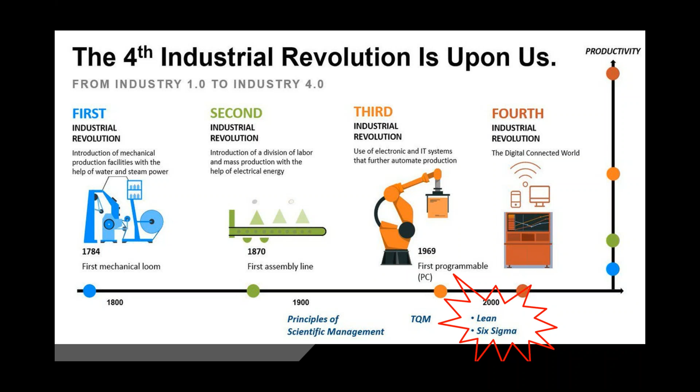So this is something to keep in mind, Lean and Six Sigma. If you watched the previous MPC webinar, especially the second one, the speaker talked about Lean management. He already mentioned that before technology comes in, you must start with dealing with what actually happens in your factory, in the process line. If you are unable to solve the problem, then you bring the technology in, like software and hardware, to try to optimize and reduce the cost.

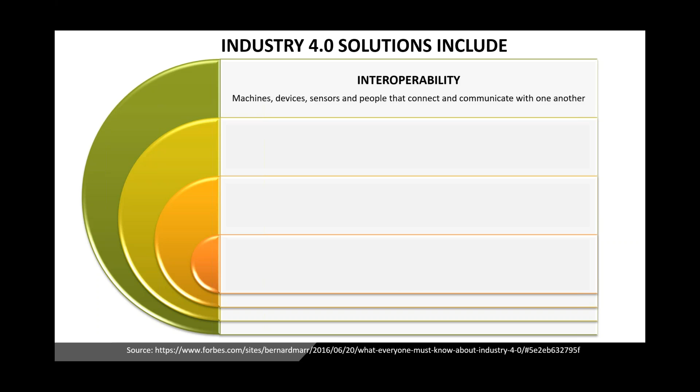So Industry 4.0 solutions include, just as a general introduction: first, interoperability, where machines, devices, hardware, software, sensors, actuators are all interconnected and communicate with each other. It's very ideal. Machine to machine talk, human to machine. That's interoperability in Industry 4.0.

Secondly, transparency of information. In the past we depended on humans, on the operator and the supervisor, to feed us the information. But of course, when humans feed back information, the accuracy is not high enough, or maybe there is some hanky-panky behind the data fed to the owner or the PIC.

So Industry 4.0 really makes the information transparent, naked. We know what actually happens on the shop floor. Of course, to get to this level, you need a lot of technology embedded in the machine, or retrofitting the old machine, etc.

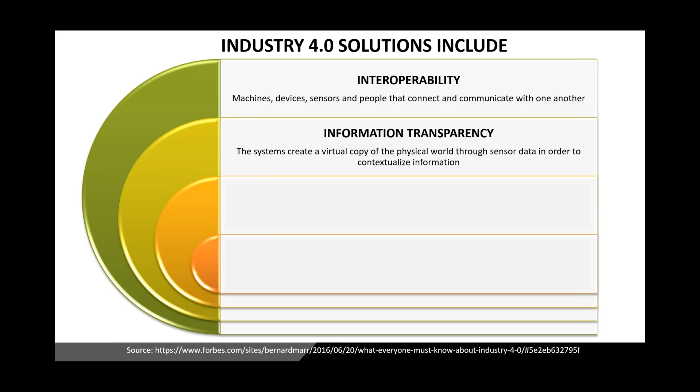Thirdly, the ideal way for Industry 4.0 is to decentralize decision making. They cut off a lot of red tape, a lot of levels for decision making, and a lot of time. This is where the cyber physical system makes simple decisions on its own and becomes as autonomous as possible, to cut red tape and time in decision making.

Lastly, technical assistance. It's about the ability of systems to support humans in making decisions and solving problems, and the ability to assist humans with tasks that are too difficult or unsafe for humans. This is what happens.

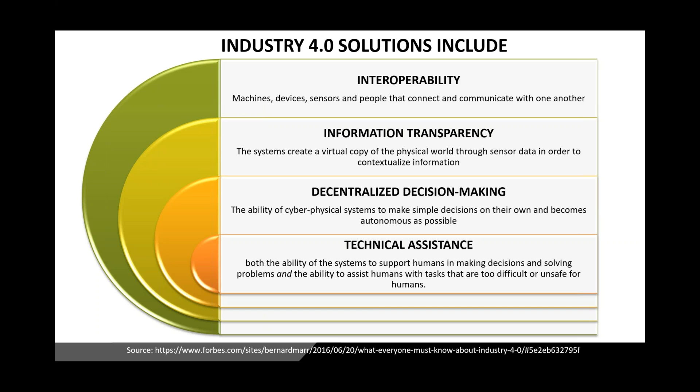Too difficult, unsafe, or the human is too tired, because humans themselves can't work 24/7. So we need something to support us. The company needs technical assistance to increase its productivity.

As you know, Malaysia already launched the National Policy on Industry 4.0, or in short Industry4WRD, since 31st October 2018. I hope you all really read through this policy and have some idea of what Malaysia is going to do for the industry. For Industry4WRD, in the logo you can see ACT: attract, create, and transform.

If you are familiar with the Industry4WRD readiness assessment, or this policy, there are 3 focus factors. First, people. Second, process. And thirdly, technology. People is about how you create and nurture more people to support the industry towards Industry4WRD. You need talent to support the industry, and retraining, reskilling, and upskilling of workers.

For technology, there are certain technologies that enable the company towards Industry4WRD. In Malaysia's Industry4WRD policy, there are around 11 enabling technologies reported. Process is how you use the technology to improve the process and increase the productivity of the company. So these are the 3 main factors: people, technology, process. It's the way towards Industry 4.0.

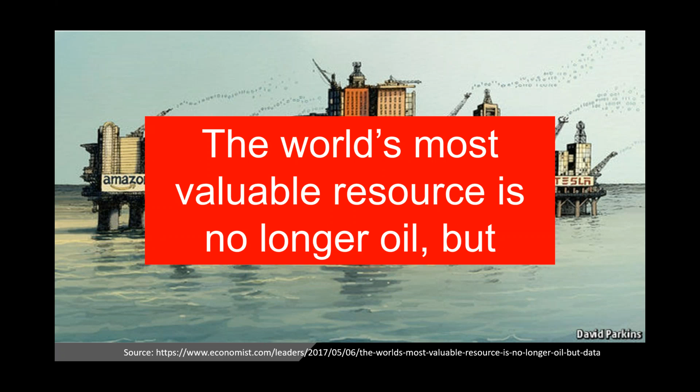This comic cartoon shows Amazon, Uber, Microsoft, Google on the oil platform. So what is this about? The world's most valuable resource is no longer oil, but what? Data. We need data.

Every day we use mobile phones. Some of my friends have 2 phones. What do they do with them? They use them for personal matters and official matters, with a lot of apps behind. Now, during the MCO, I think most people like to shop online using Shopee, Lazada, Alibaba, Tmall, etc. A lot of data is generated behind that, captured by the owner, by the app developer.

For what purpose? To analyze what is the behavior of the consumer. Yeah, this is data for the retail industry. How about for the manufacturing industry as well?

Manufacturing industry, right, in the process side, a lot of data is generated. Okay? Traditionally, they capture data in the manual form. People just record the data. Or the more advanced ones, they're using the SCADA system, or the PLC and SCADA system to capture data. A lot of data is being generated, but are they doing something with the data, or just using the data to plot the graph and then that's all? They're not really fully utilizing the data for decision making purposes.

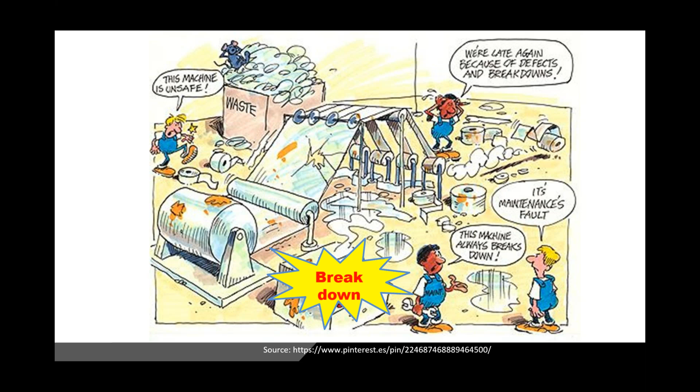So ultimately we want to know what actually happened, then we try to solve the problem. Okay, so in traditional companies, the shop floor is very messy. There are a lot of breakdowns of the machinery. Maybe setup and adjustment problems, wrong setup or wrong adjustment of the machinery. And then small stops. Every small stop causes delay. And then small downtime.

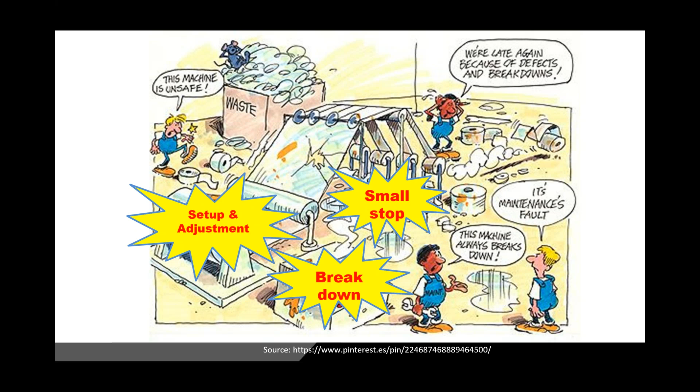And then there are a lot of reduced speed problems. It should run up to this speed. Why suddenly does the speed slow down? And then maybe the startup reject. Not proper startup, not proper setting, causing startup reject of the machinery. As well as production reject. The setting is off, the misalignment of certain things, causing production reject due to quality. Not up to the size that we want, not up to the precision that we want, causing the rejection.

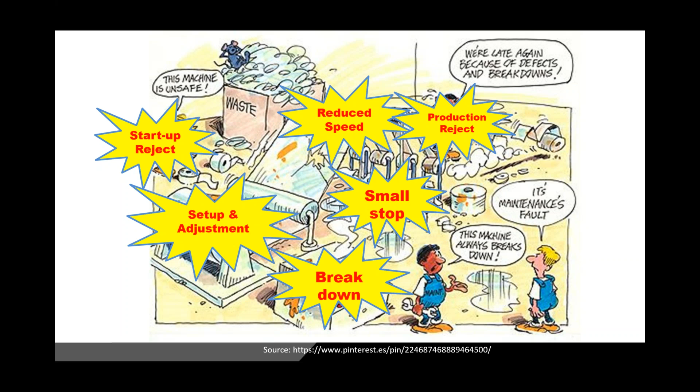And this is all about the cost. The time lost and the rework cost a lot of money, right? And also the energy usage in the factory, all about the cost, as well as a lot of waste. When there is a lot of reject, some items that cannot be recycled are waste. If it is recycled but the value of the material has already dropped, then that becomes a waste. It becomes a loss to the company.

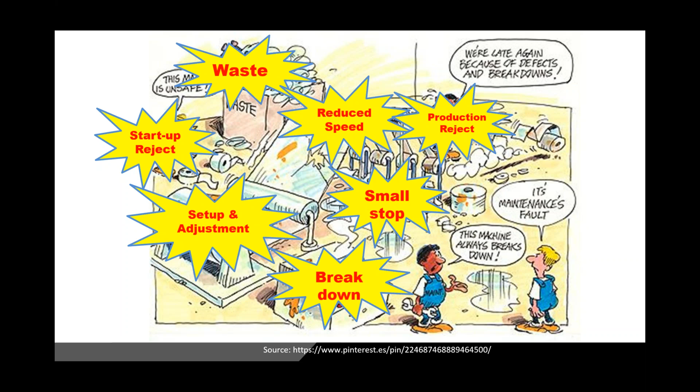So as management people, engineers, supervisors, a lot of questions come into our mind, right? Normally, who is causing the problem? Who is responsible? Normally we know, but who is the actual person responsible? Who to involve? Who to call? And then what happened? What actually happened to the machine? Why is it always stopped? Why is the speed always not up to the level? Why is the productivity low?

And then we need to ask ourselves, where does the problem come from? Which part is causing the problem? And then why has it happened? Why did this happen to section A, not section B? There are a lot of questions coming up. And then where did it happen? And how did it happen? This is the 5W1H, a very common method, right? We think about who, what, where, why, when, and how.

So this OEE, overall equipment effectiveness, is interrelated to total productive maintenance. So here's some idea for you. TPM is about zero unplanned downtime, zero defects, zero disruption. It means the company, the shop floor, has very proper planning for the maintenance of the production line.

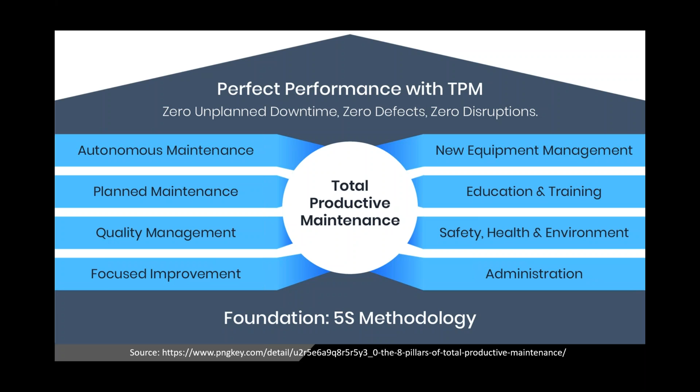This TPM has the 5S methodology as its foundation. I think some of the topics were already covered in the previous MPC webinar as well. Okay, so I just set your mindset: what's the data, then what happens on the shop floor, and then what's TPM, total productive maintenance. Okay, so coming to OEE. OEE is very straightforward, right?

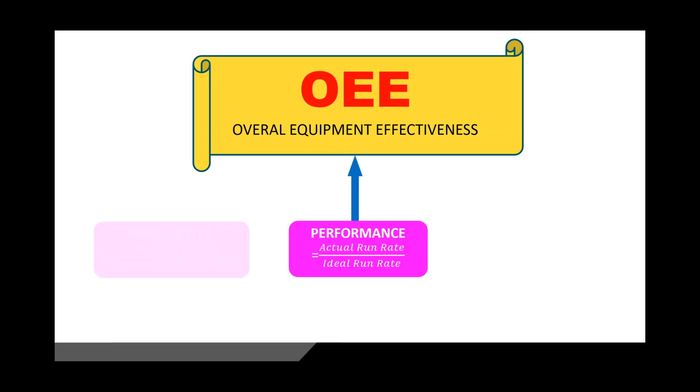It's a formula for us to know the effectiveness of the equipment on the shop floor. Or in very simple terms, we want to know the productivity of that machine or that equipment. So OEE has three major factors. First, we look at performance: the formula is the actual run rate over the ideal run rate. Secondly, availability: the operating time over the planned production time. Thirdly, quality: good pieces over total pieces.

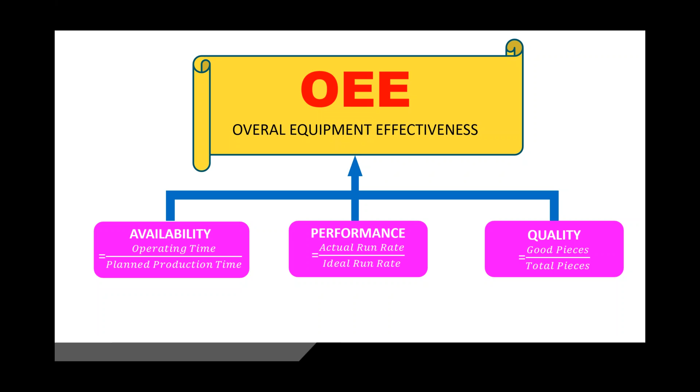I think after my talk on this topic, Mr. Loong will continue with how to implement OEE on the production floor. Please stay tuned. And then, OEE can generate a lot of data, and we can plot a lot of graphs. These graphs let us know what the data is useful for. They can give us some ideas.

They give the supervisor, manager, senior manager, and top management ideas about what to improve, where to improve, how to improve, and what's the best method to improve, using the management way and maybe the technological way to improve the process. It's for decision making as well. This data will feed to management for more precise decision making to target the actual and right problem. And then it's a tool for planning.

Of course, some people say that OEE actually is a KPI. If this machine cannot achieve 100 pieces per hour, then there's something wrong there. KPI. But normally it's actually used with positive thinking, for improvement, decision making and planning. It's not meant to accuse anyone, like, hey, I implement OEE because I want to monitor you.

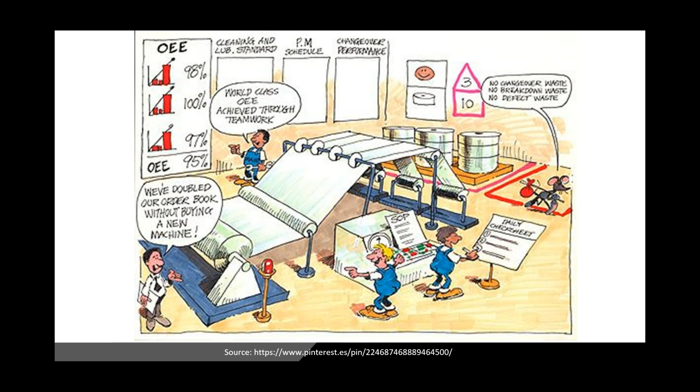Normally we like to advise all factory owners and engineers: please look into your process first. Improve the process using lean manufacturing methods, like in the second series of the MPC webinar where we talked about lean, right? The management and administrative levels have to think about the best way to improve, to cut down, and to solve the problem first before you engage the technology.

Okay, this is something to think about, because I think most of you are very experienced in the industry. You use a lot of methods, okay? TQM, Gemba, Kaizen, right? And Poka-yoke. With these methods, try to improve. If you really cannot improve, and the price is very competitive, then think about how technology can really improve it.

You also can buy a new machine, but before you buy the new machine, think about: can I further improve what we have now, the existing machine, before we make a new investment? It's something to think about. And then, of course, we can make the investment decision, whether to put more money into improving the current process, to go for upgrading, before buying the new machine.

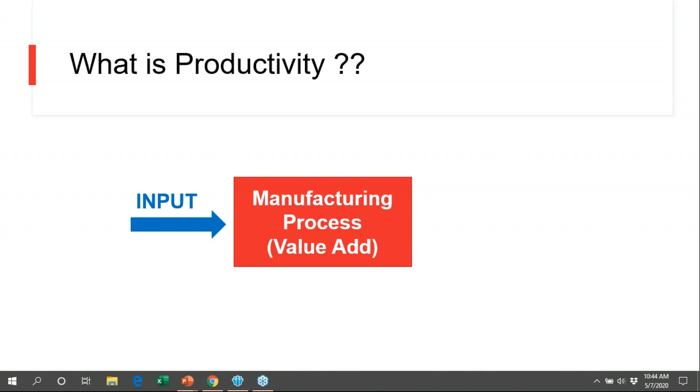Next. Okay. People start to talk about efficiency and also effectiveness. Now, where is efficiency, effectiveness? Every value add or every manufacturing process, you will always have an input and an output. Efficiency talks about the front part, where you use as little as possible, try to save whatever you can, and effectiveness is the other end, we should talk about the output, maximize whatever you can maximize. Okay, this is what we meant then as productivity. Next, please.

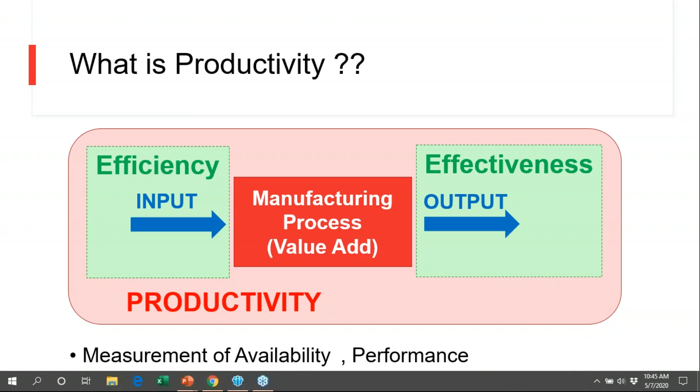In productivity, in general, it's always expressed as a ratio of output to input, for example output per unit of input. Now, moving on, when these terms came up, there's a lot of research on productivity. And when we research productivity, there are new terms which are developed. Next, please. You have downtime, which is actually availability. You also talk about cycle time. Next, please. Which translated now is performance. And you have a lot of talk about rejects. Next, please.

on this one. But just a point here is, like what Dr. Tan said, availability is easy to measure when the machine is down, when you stop the machine for changeover. But the difficult one will be performance, because every minute that the worker slows down for whatever reason, every 2 minutes that he goes to the toilet, those are all unrecorded. And hence it makes it difficult for us to further improve it.

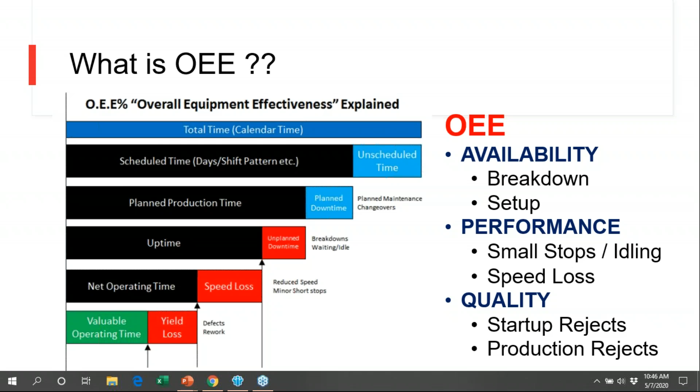Okay, as an average, manufacturing plants run between 45 to 65% OEE, but again, this is a very general number, and sometimes it can be a dangerous number because every industry is different, every machine is different, every industry in terms of sales demand is also different. There is mass production, there is batch production, there is mixed line. There are so many components inside, so we should take it with a pinch of salt. Okay, next please.

Okay, now I'm going to come back to the company. Our journey in Lean. We were introduced in 2014. In 2014, we had a good introduction from MPC and FMM. And along the way, we had SHRDC come in. We had some Japanese counterparts. At one point, we had an in-house Japanese consultant to introduce it to us. Now, what was good then? Next slide, please.

Okay. What was good then is we were discussing among all the parties, getting information, getting input. We managed to establish a lean strategic map for ourselves. Now, this was very new to us. That was back in 2015. We had a map, but frankly, we had no time frame. That was because we weren't sure what was going to happen. So we decided to take it one step at a time. What we knew was that there are only 3 steps and we need to get through the 3 steps. So next, please.

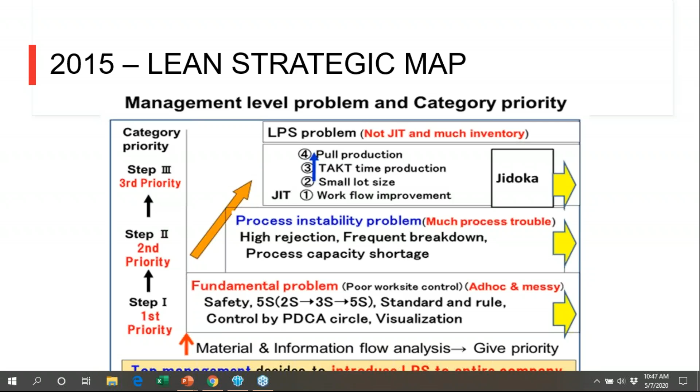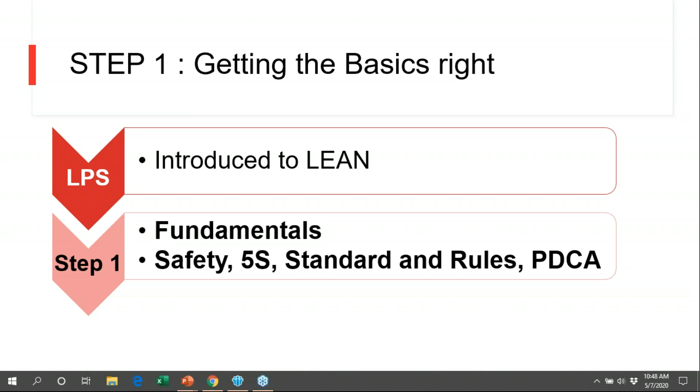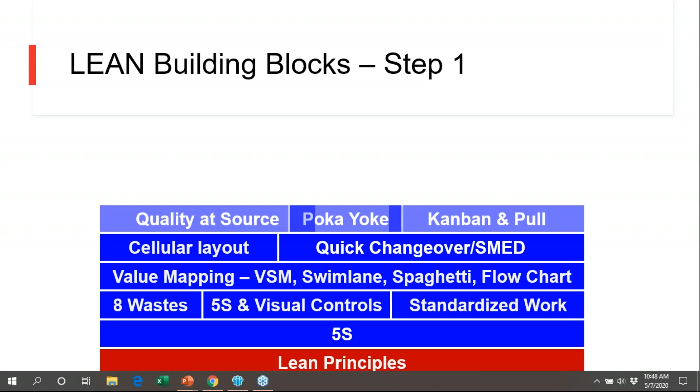So we start with step number 1. One more click. Yep, we start with step number 1, which are the fundamentals. Fundamentals: 5S, safety, standards and rules, PDCA. These are all standard fundamentals. Next, please. Okay, fundamentals start from the lean principles. The basic is always 5S, and then you have 8 wastes, visual controls, value stream mapping, cellular, SMED, more. Yep, TPM, and finally, you will talk about continuous improvement as a whole.

But in step 1, we mainly focus on, next please, 5S. So this is our main focus, 5S. Now, 5S seems to be a very generic word, right? Everyone knows what 5S is, everyone is practicing 5S. But to really, truly appreciate 5S, you need to understand that by having good 5S, it means that you

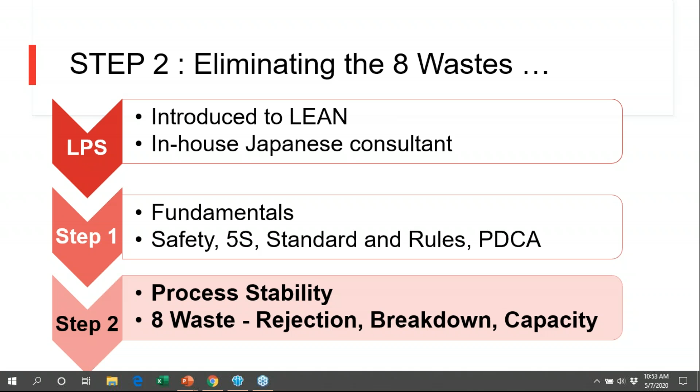Okay, we have passed the first LPS introduction. That's where we did our strategic map. Then we move into fundamentals, and now we talk about process stability. Frankly, this is a very long step, as we talk about process improvements. We talk about the 8 wastes, rejection, breakdown, and capacity. Next, please.

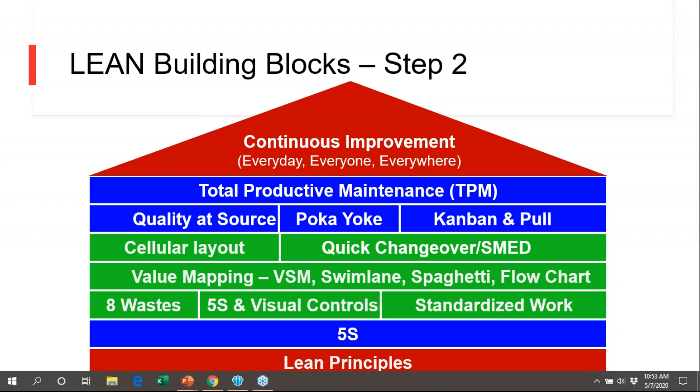Okay, back to this again, lean principles. What do we use in this step? Next, please. The major tools that will be used here are cellular layout, SMED, value stream mapping. We talk about the visual controls and standardized work. Next, please.

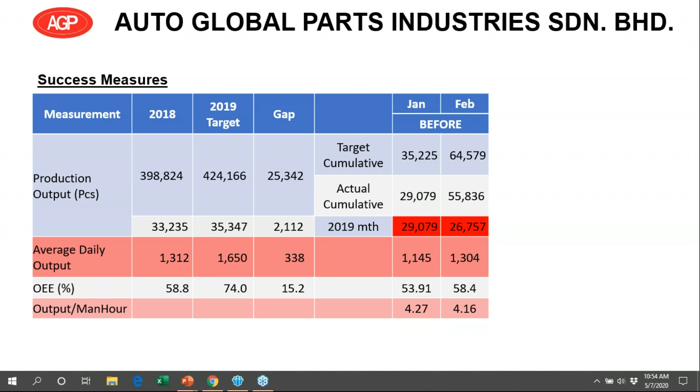In terms of measure, we look at the output, because eventually output will create value for the company. So this is always our main outcome. But tied along with it, we have other balance measures. So we talk about OEE. OEE here is important because why? Next, please.

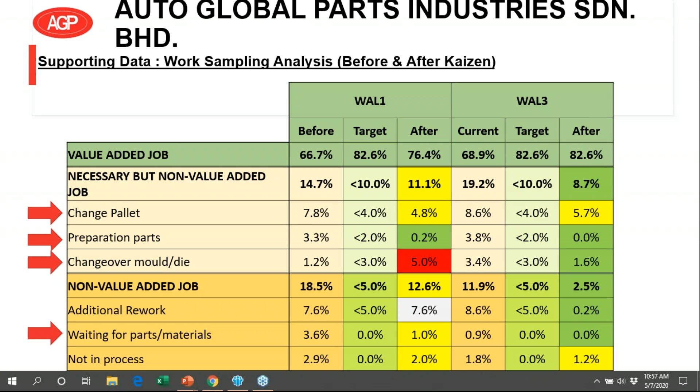Okay, after that, we did another sampling to see what was the result. If you can see the results here, from 68% of value added, we have moved it to 82%. So I think that was quite a good result. Okay, move on next, please.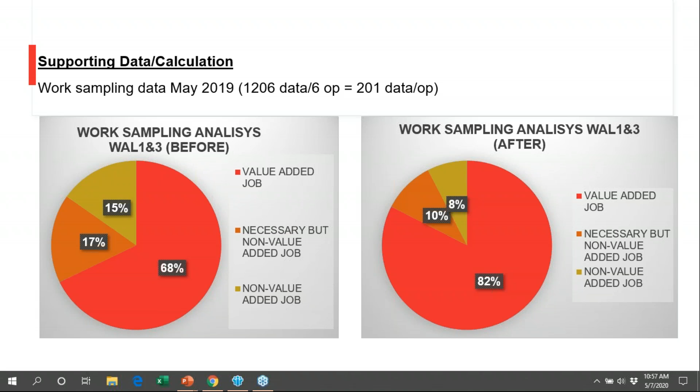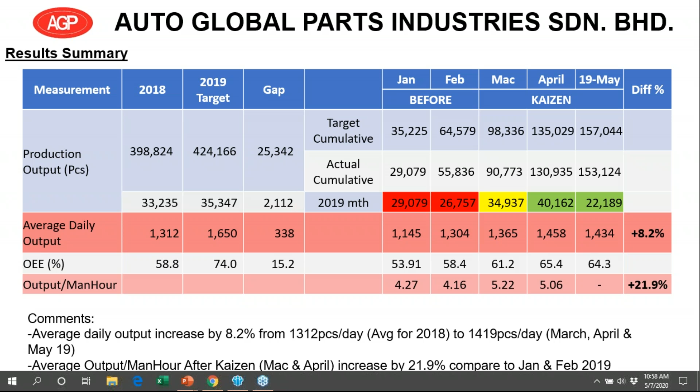This is the final measure of the project's outcome. Production pieces increased. OEE also improved. In a mere 5 months, we have already increased 8% higher than the previous year, 2018. So this project, my team was very successful. The team was good, and we managed to get through. Okay, let's go to the next project, please.

Okay, the next project is more on availability and setup. Okay, next. This project, again, we depended on OEE to highlight and tell us which are the problem areas. And this was a very good project because from the OEE, we managed to see what was the low-hanging fruit. Focus on the changeovers. This line is actually a very high mix line. In this line, there's about 30 changeovers. So if you improve on the changeover, you can save a lot of time. So that is what we focus on.

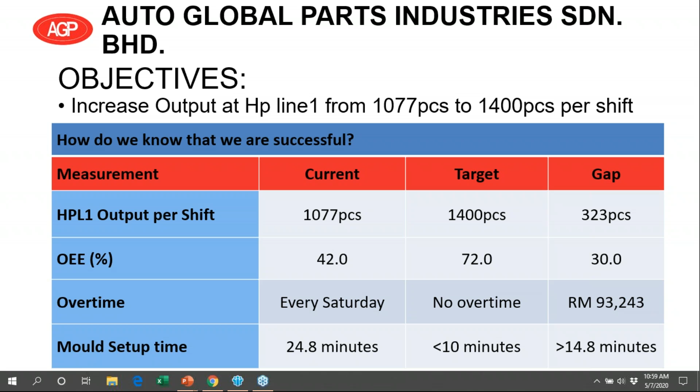But instead of using SMED, the single minute, we won't be able to do that. So we tried for single digit. That's why it's less than 10 minutes. Okay, next please.

Okay, from the result here, you can see before we had 24.8. After, 11.2, which is short of our single digit. But with this, there was already a significant improvement. Considering the changeovers that we have, we managed to save 9% just by focusing on changeover. It's 9% of our output. So again, we deem this as very successfully indicated from the OEE side. Okay, next please.

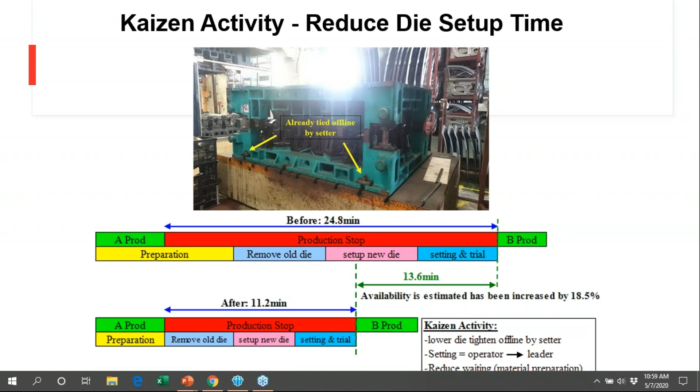Okay, those were 2 examples that we have. We are now in step 3, where we talk about pull production systems versus push, and then just in time and small lot size. Production now is much more predictable. There are much less surprises, meaning that if we target 1,000, we probably will get about 95%, if not higher.

The workers, I think that is the most important. The workers, the supervisors, the engineers, managers, they are already introduced to Lean. Everything they think is Lean. We have not started small suggestion systems like Teian yet, but this is probably one of the next few things that we need. But then again, as I mentioned earlier, step 3 here is going to be another difficult chapter. So we are going to have to plow on, and what else can we do to improve this? Okay, next please.

Now, these are the benefits that we experience using OEE. Of course, first, baselining and benchmarking. Benchmarking is among yourself. It's good for tracking progress, knowing your current situation and how you can improve on it. The second one is about pointing out causes and symptoms. OEE has the ability to tell you roughly where it is, but again, that's what it does only, to tell you where it is. After that, you will have to use all the lean tools to improve the situation.

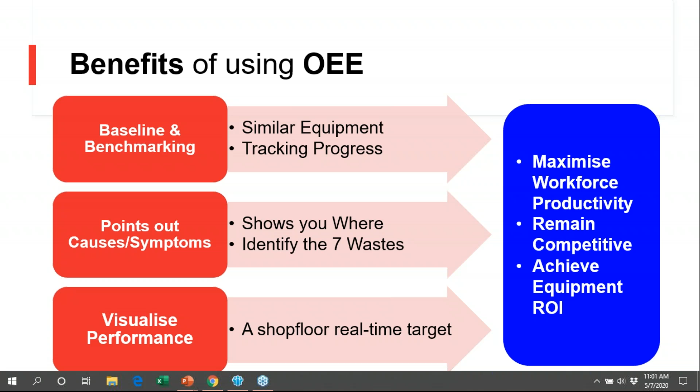And of course, it's a good visual performance. It's something that everyone understands, something that the operator can see and say, okay, my performance is not good, let's push it up. So because it can be live data, the worker can actually respond to it. Okay, next please.

Okay, lessons learned. Throughout our years, we've made many mistakes and we have learned much. I think the first one is focusing on the score, not the losses. This is particularly why I put it as the first one. We started off on the wrong foot. We used OEE as a KPI then. When you use a measure as a KPI, it doesn't translate well because, like what Dr. Tan said earlier, people will think of easy ways to achieve it, shortcuts and so on. So focusing on the score did not help us at all.

When we reverted, we actually focused on the losses. We looked at what the losses are and where the losses come from. That was where the improvement came from. Second, we're talking about unrelated processes and plants. As you know, earlier I presented that we actually have metal and also plastic injection. We also made this mistake, comparing metal processes versus plastic injection.

Big mistake, because plastic injection is just molding mostly. Pump in the plastic material and out comes the product. Metal has multiple processes. The BOM is probably 20, 30 steps. So to actually compare such different processes and products is not correct. It's not feasible.

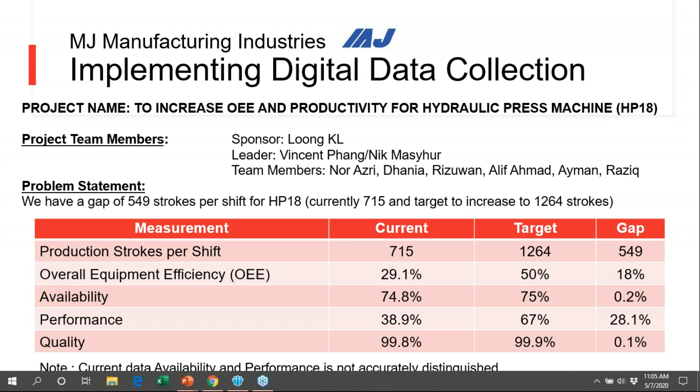We tried to implement a monitoring system. Thank you to MPC and SHRDC and also Iconics. They assisted us in installing equipment to link up and digitize our machine, and then collect data. So this actually propelled us into the first step of IR 4.0, where we talk about IoT, Internet of Things. We digitized our old HP machine.

Following that, we did data acquisition, connecting to the PLC to start collecting the data. The data can be collected every 500 milliseconds, but in the beginning, we started to take data every 10 minutes. From there, we can talk about mining the data, understanding it, looking at the trend, and eventually the texts say we should go into machine learning, deep learning, but that will be very, very far away. We will be satisfied if we can actually mine the data and then improve the process. Next, please.

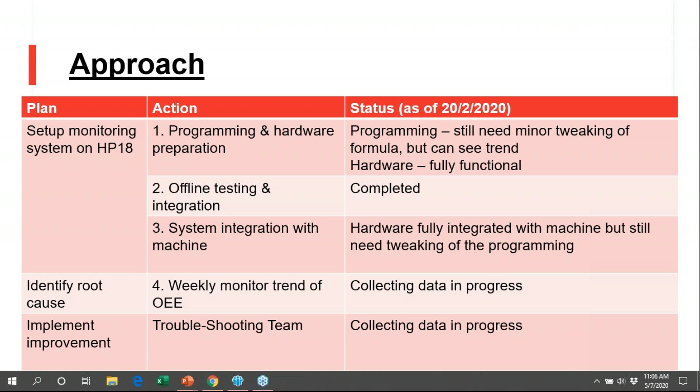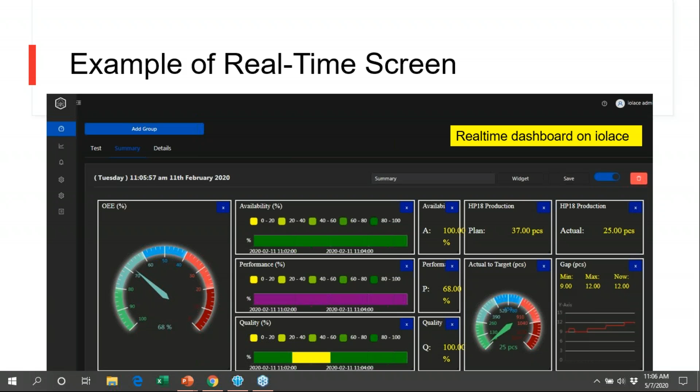These are some examples of the screens you can get. This screen is actually at the machine, so it is something that the worker can see. Very visual, with some dials, with colors. Workers will be able to see whether they are green, red, or super dark red. So this will actually encourage them to work faster if needed. Next, please. For analysis purposes, there are other screens.

You can look at the data by 10 minutes. We can see where the fumble is, and we can look back at the record and understand what happened. Next, please. Okay, I think that's the end of my presentation. But I just want to share my experience, as I mentioned earlier, the missteps that we had, the lessons learned.

The most important one is that OEE is an improvement metric. It's not an outcome or a KPI. Once you move it into a KPI, everyone will take it overly seriously, which means they will be very manipulative with the data. So it works better as an improvement metric.

OEE cannot or should not be used in every single piece of equipment. It is most suited for the process bottleneck. However, if it's the process bottleneck, you need to be aware that the bottleneck needs to correspond to the takt time, which is your sales demand. So there's no point having a scenario where you actually overproduce, which is one of the wastes.

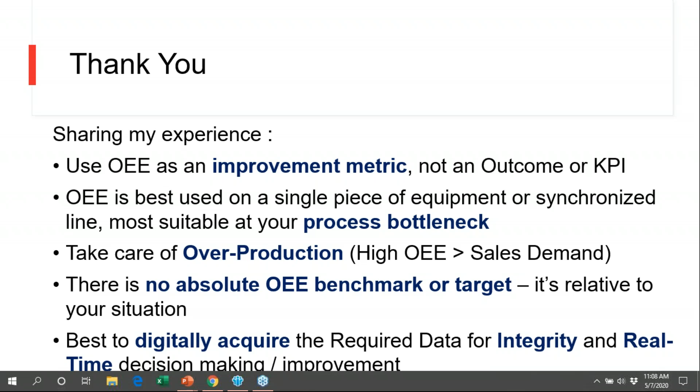And of course, there is no absolute benchmark. Many people say the world-class benchmark of OEE is 85%. But again, with 85%, you need to know what industry it's in. It could be in electronics. It could be in mass production. For mass production, I think 85 is a bit low. But if you are talking about high-mix, low-volume products with multiple changeovers per day, you need to look at the OEE that you are most comfortable at, and that can actually give you value and supply to sales.

The last one, of course, is that it's best to digitally acquire the data. Why? First of all, integrity. Sometimes there are key-in errors and so on because it's manual. Integrity means the data collected is not manipulated in any form. The other one, of course, is being in real time. You can position LED boards at the machine to inform the workers, to get their buy-in to work towards the target, rather than find out at the end of the day. Then you start asking 5 whys. That will improve the following day, but you've already lost 24 hours. In manufacturing, 24 hours is a lot.